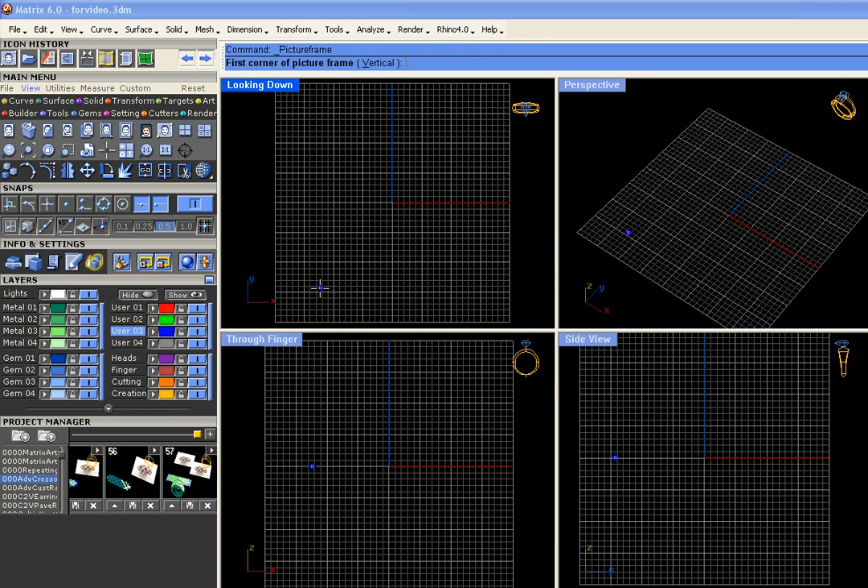Okay, once you've found that image, hit open, and the next thing will be to click Shift and drag the bottom edge of that photo along. Okay, and then you'll be able to center this and scale it to the size of the actual ring so you get some idea of the size this should be. So let's begin with the finger size, the finger rail, and then we can center this on the finger rail about 2 millimeters past the edges of it. That's actually not so bad.

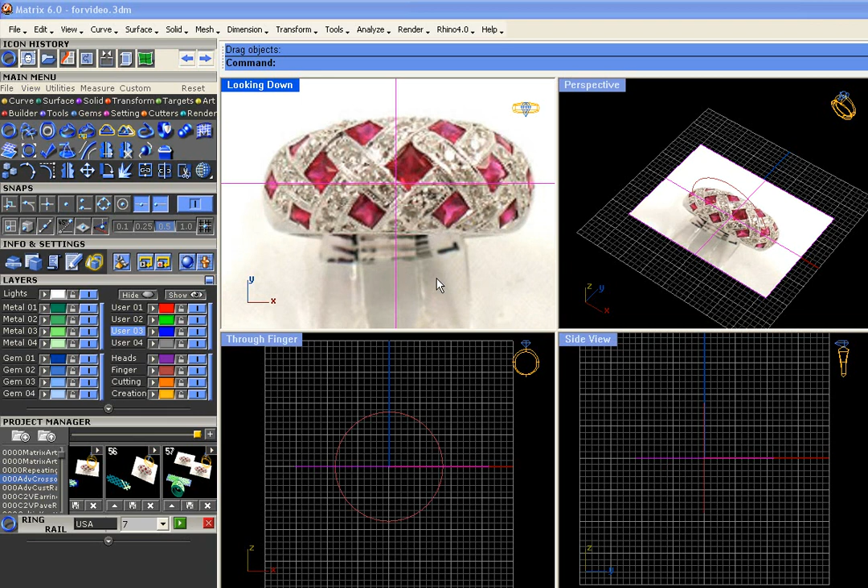Okay, or if you prefer, you can just click and drag this off. The picture frame is a great tool to use because you can just pick up the surface and drag it around. The only thing is I like to put it on a layer color I don't use a lot, such as lights, and then lock that layer. And that way I can't accidentally select it.

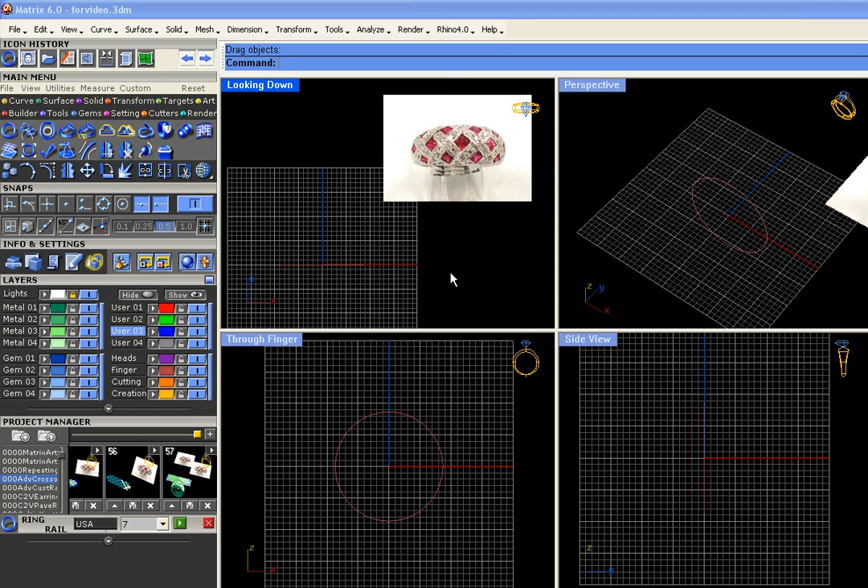Okay. To begin creating this, let's draw the taper for this ring in the side view. To start, I'm going to just place the curve tool line with the both sides option here right at the inside of that finger rail. And as I hold down Shift, I'm going to drag this out to the width that I want at the bottom of the ring. I want it a little wider actually, so right click, both sides, click and drag that out. Okay.

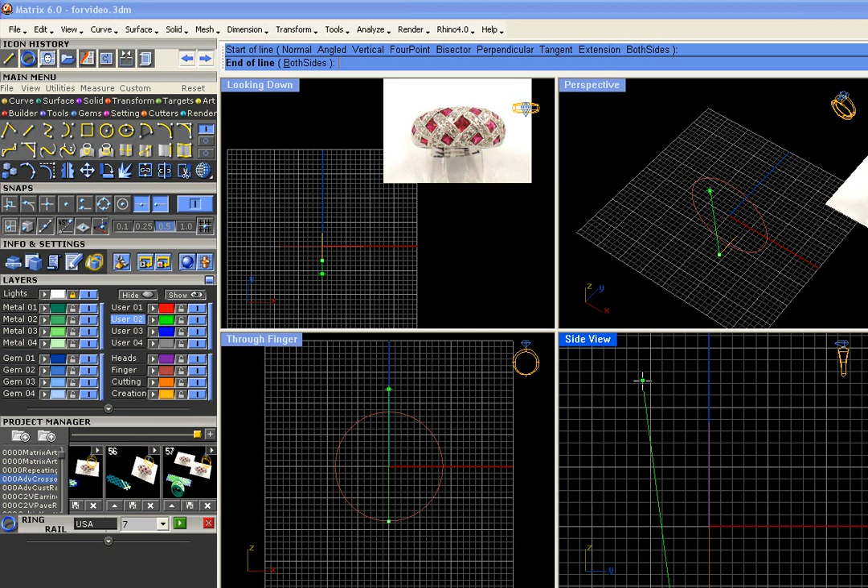The next thing is going to be to create this taper with the line tool. Just click into the end right here and extend it pretty far up past the top of this to the width you want for the ring. F4, Shift. Okay. I just mirrored that to the other side using F4. Okay.

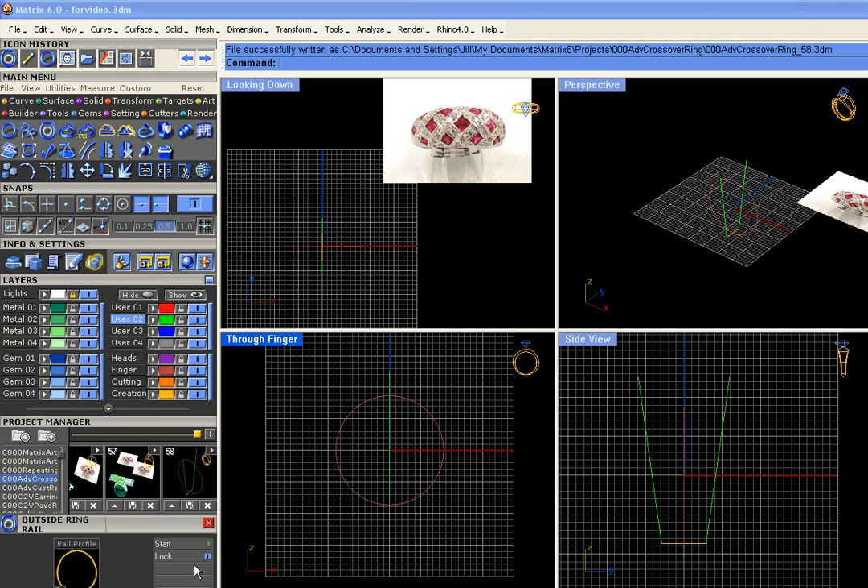The next thing will be to place the outside finger rail here. With the outside rail tool, just hit start and you'll get all the handles for that. We're actually going to just create the side of the ring using this. So we're going to draw this up to 1.5, this down to 1.3, and this is the bottom up to 1 millimeter. Holding down Shift, you can get those right on. Okay, press Enter to keep that.

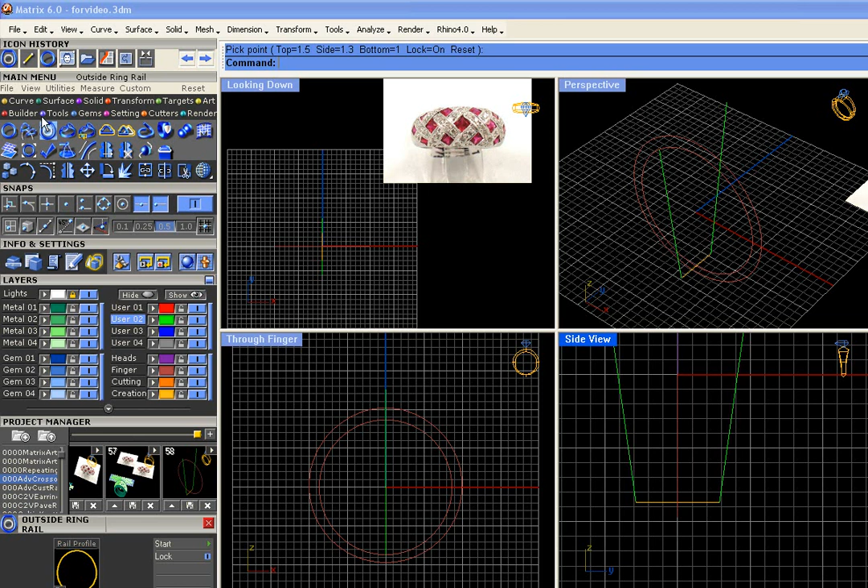And using curve from two views, we're going to be able to place the outside and inside finger rail on an angle with these two curves. Before we do that, as you know, these curves have to extend down past the end of this rail, which they don't yet. So we're going to run the extend command. That lives right here in the curve menu. Just press enter for dynamic extend. We're going to extend this guy

and this guy. Okay, and what happened there is Rhino history is turned on, so when you extend one curve that has been mirrored, its mirrored copy also does the extend. So we can turn that off. It sometimes messes with matrix history. Okay, and let's drop back this.

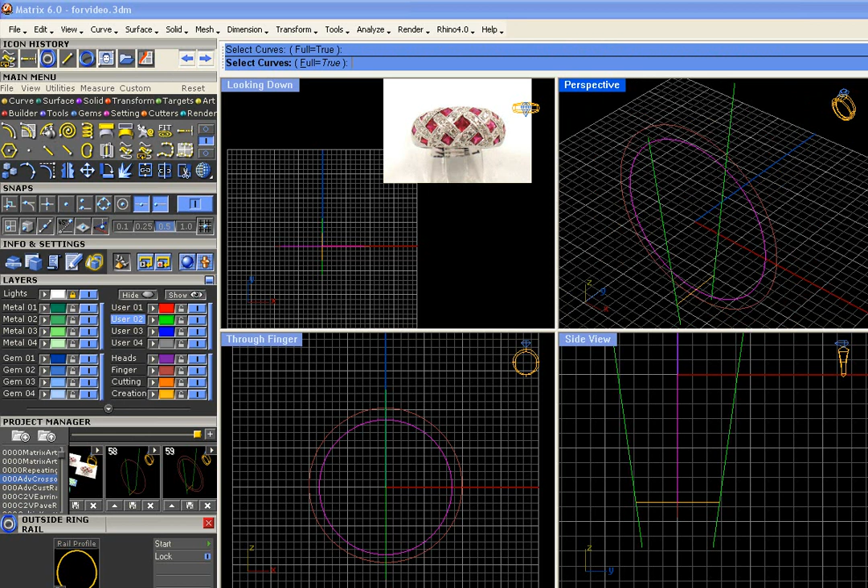Alright, curve from two views is going to give us two curves that match the angle of the green lines there. So let's run curve from two views with history with the inside finger rail and one line. Repeat the inside finger rail and the other line. Repeat the curve from two views with the outside rail and the line. And one more time with the outside rail and the line. And there you go.

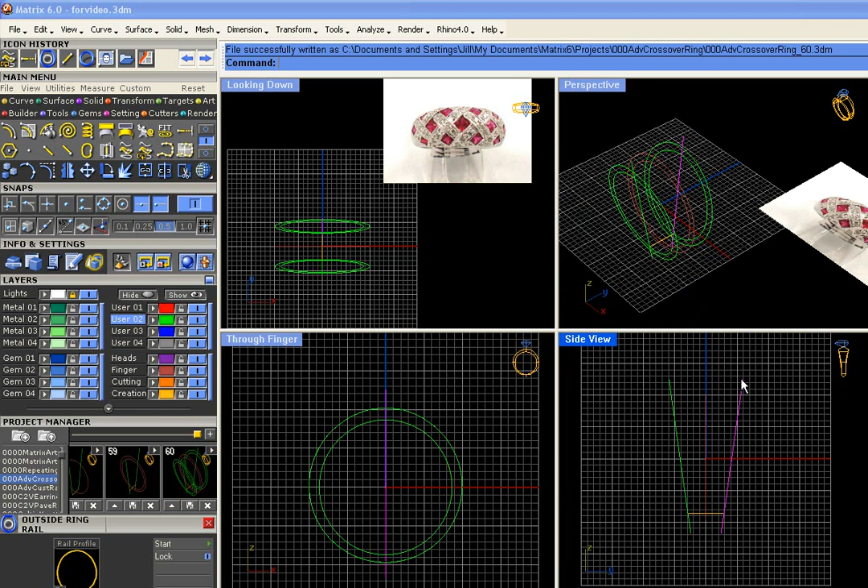Okay, we're going to look at creating the profiles for this. Now, I like to hang on to the original curves, so select these, run the duplicate in place option, and with one copy still selected, place those in another layer color and turn them off. That way you've got a copy saved. We're going to take the originals here and split them with the two sets of curves that touch them. Okay, we can get rid of everything we don't need.

Delete that, and what we're left with are curves that touch precisely. We're going to be just surface modeling this little ring. It's a pretty simple ring, but we want to make sure everything lines up. We're going to show you how to do that.

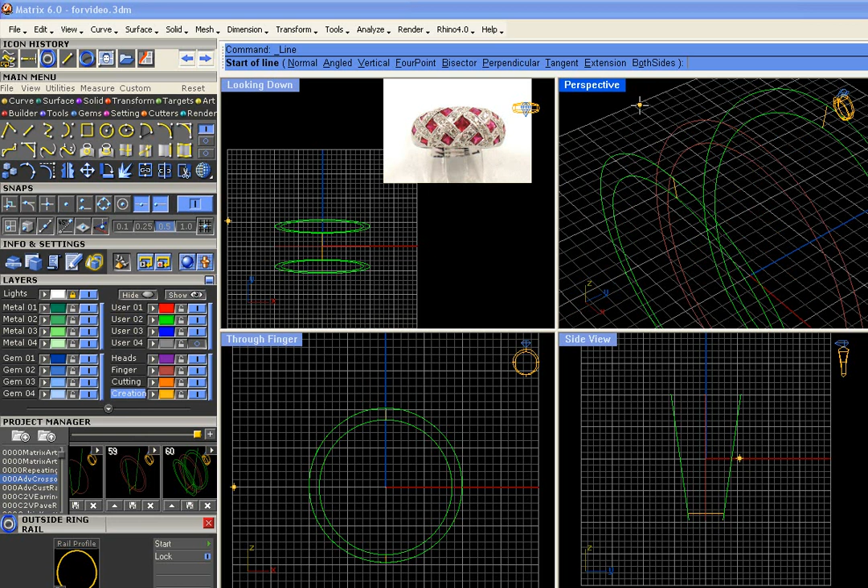Okay, so right now these profiles touch these rails perfectly. With the line tool again, we're going to draw a profile that extends between these two and touches them end to end. So we've got a matching at the top and the bottom. And we'll go ahead and join this.

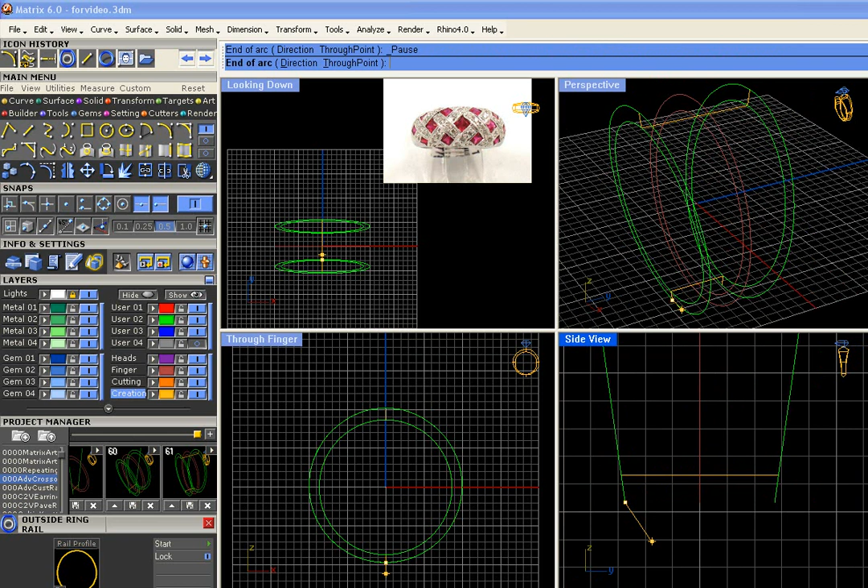And now with our arc direction tool, we're going to create the bend in this ring. So grab the arc direction, and touching the end and the end, we're just going to draw this as high as we want for the profile on the ring. So about 2 millimeters there.

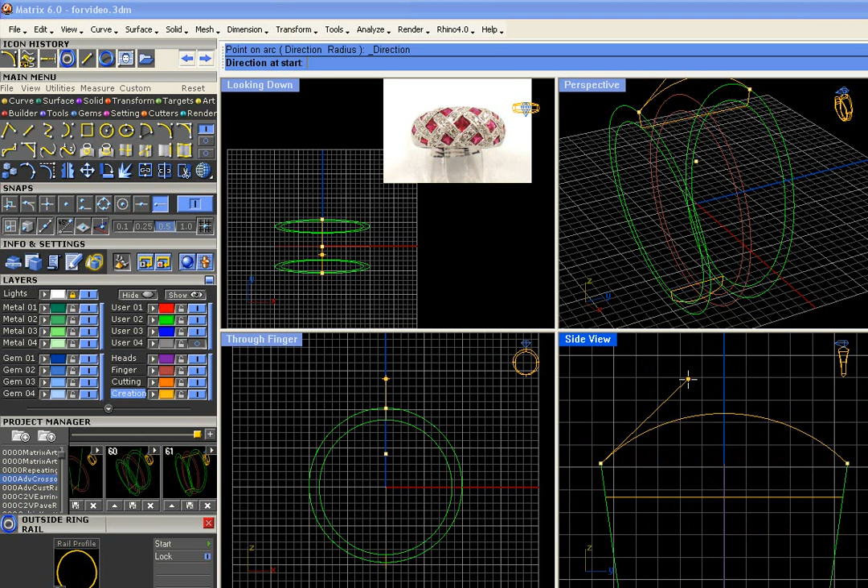Same thing at the top. Between the end, we should have an end in there. Between the end and the end. And just draw that up as high as you want. And in this way we can create a different curvature at the bottom as at the top.

We want this to really poof up more at the top. In fact, we could even do that a little bit more and really get that thing tall and puffy at the top. Okay, join this.

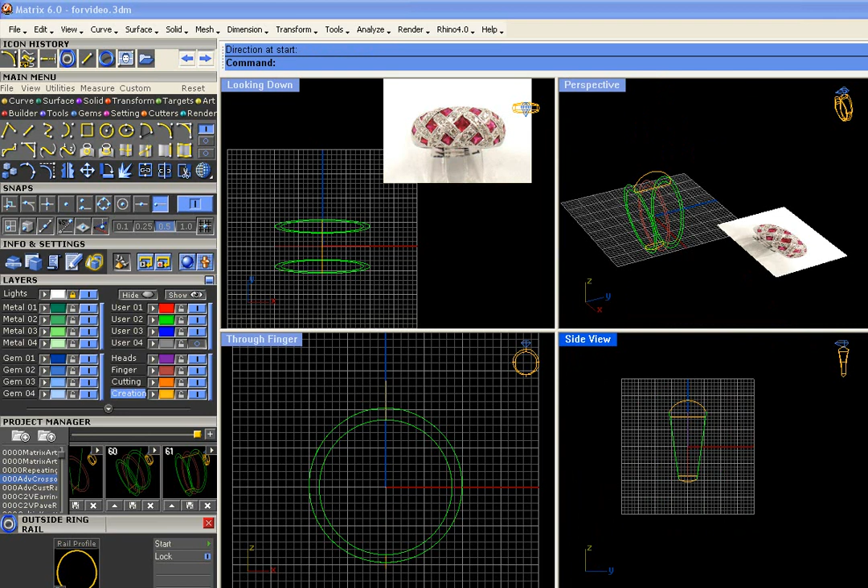Okay, and notice that we didn't join these profiles together. We're all ready to sweep them in 4 separate sweep 2 operations. This is exactly what multi-rail sweep does, only we're going to control it so that we get 4 separate surfaces in the end. So sweep 2 between the 2 rails and the profiles that touch them.

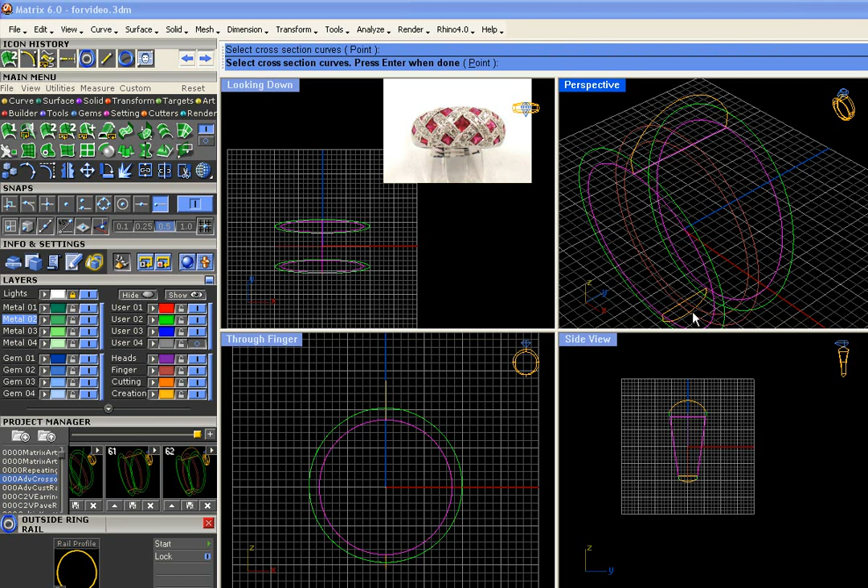Okay. Oops. Oh, we can mirror the whole thing afterwards anyway. Sweep 2 between the 2 rails and the profiles. Oops. Sweep 2 between the 2 rails and the profiles that touch them. Mirror this guy.

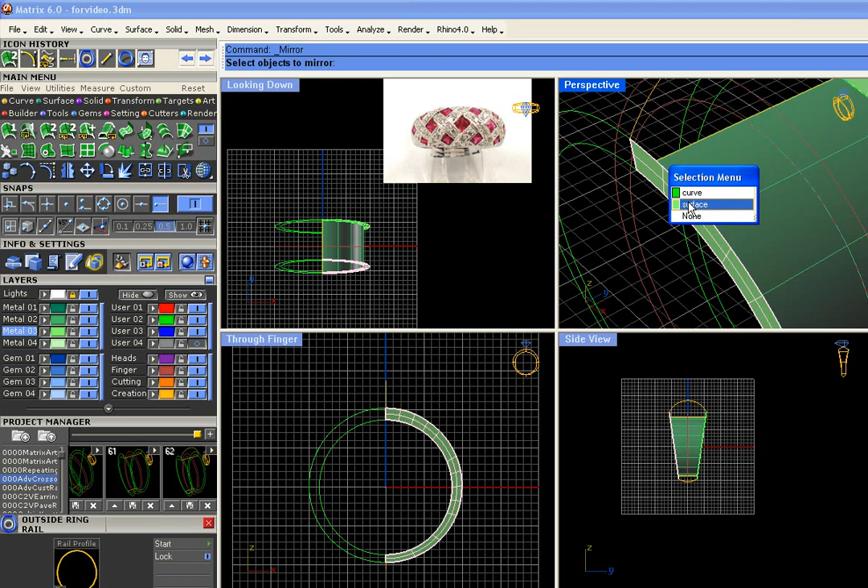F4, shift. Sweep 2 one last time between the 2 rails and the profiles that touch them. Okay, you can see the really nice shape of that.

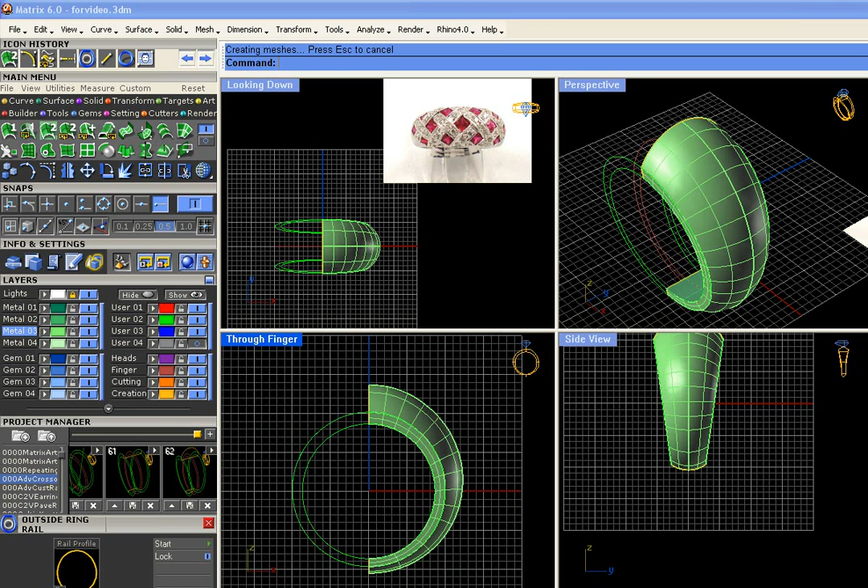And we can take all these surfaces, join them up, and mirror them to the other side of the ring. F4, shift, and join everything together. And it should create for you a closed solid polysurface if you join the inside. I forgot to mirror and join the inside. Join. Your closed solid polysurface.

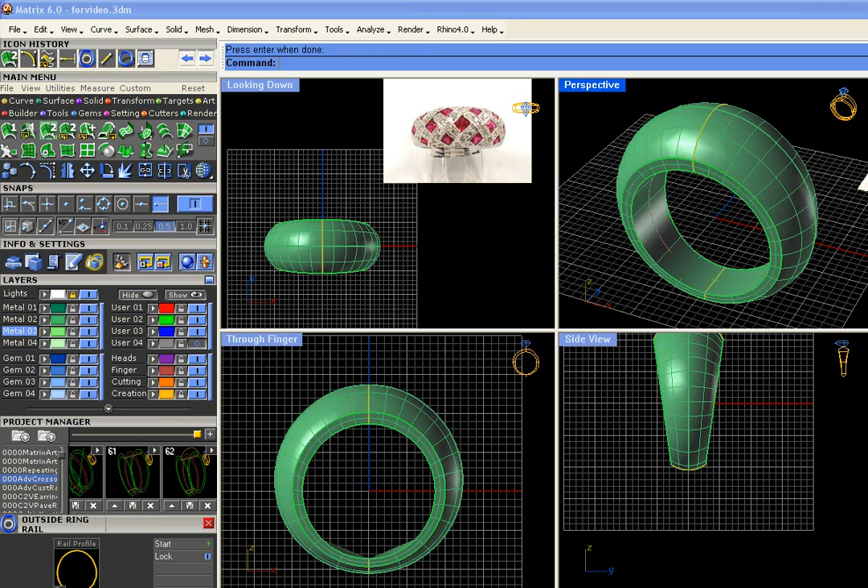Okay, get used to that. We're going to be checking for that a lot during this tutorial. It's a pretty tricky one. Okay, remember how I said I like to keep those curves around? Let's bring them back right now. They're right here. And we'll offset them to create a shape for the inset surface that all this stuff is going to go onto. Okay, so let's offset these one at a time here.

If you're not sure exactly how far you want them, just use the through-point option. And when it looks good, click. Okay, you can either mirror this or just offset the other one. We'll mirror it. And we'll put them on another layer color so you can see them really well. Cutting layer. Okay, and also determine how far down the ring you want that little surface to end.

And with the line tool, and making sure project is turned on because we're going to draw this straight flat in the viewport, just draw about the shape for that. Notice how it comes to a V here on the side. Trust me, it comes to a V on the side. And go ahead and mirror this one. F4, shift.

Now we can take all the orange colors, hit trim, and just get rid of the parts we don't need from this shape.

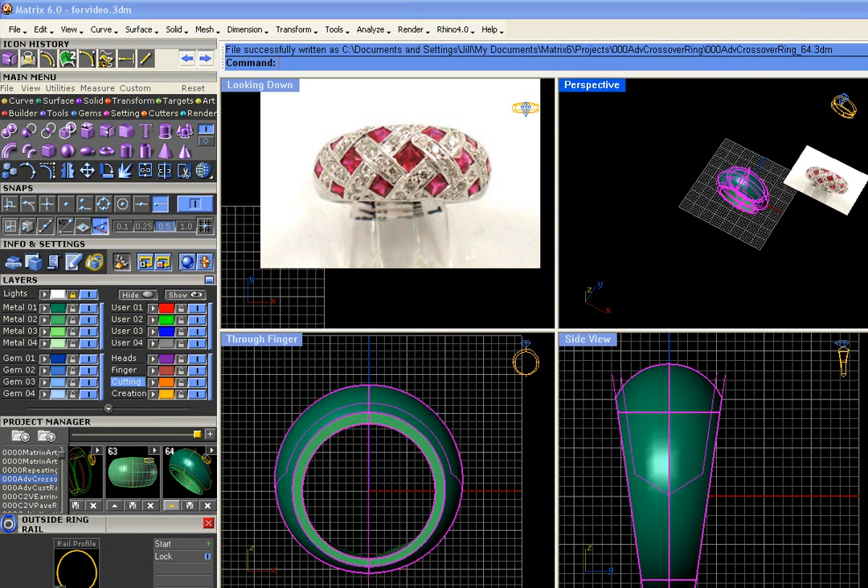We're now going to split the green surface with the orange curve. One surface has been split into two pieces, and there's one piece and there's the other. So let's take that first piece, put it on a new layer color here so we can get a good look at it. Now we're going to scale this down in order to create the inset surface.

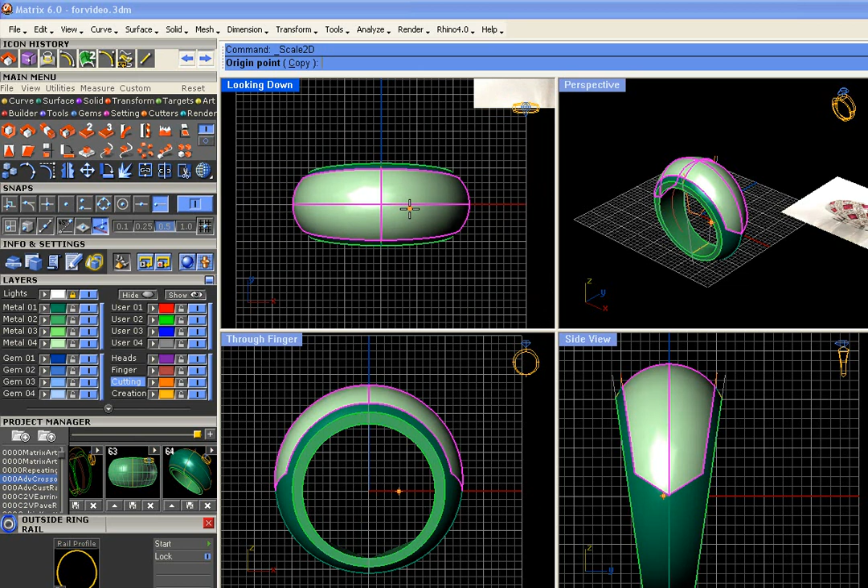So let's select just this surface here, run the transform command, scale 2D, and then looking down from F4, we're just going to click shift and scale this down a little ways. Notice that it's scaling it smaller on the top and the sides, which is good, but the very top of the surface is still all the way up at the top of the ring. So we use 1D scale from the end osnap up and just scale that down, making sure you're holding down shift so it doesn't make things go out of whack here.

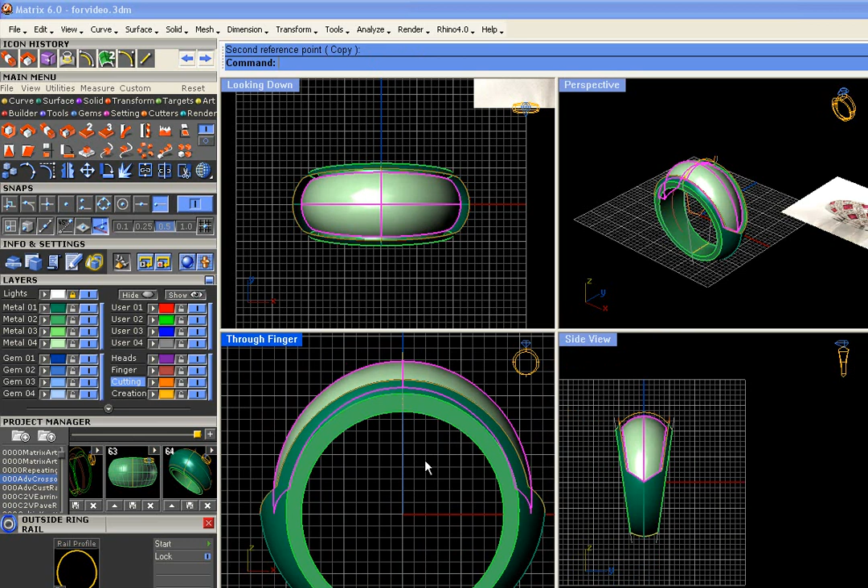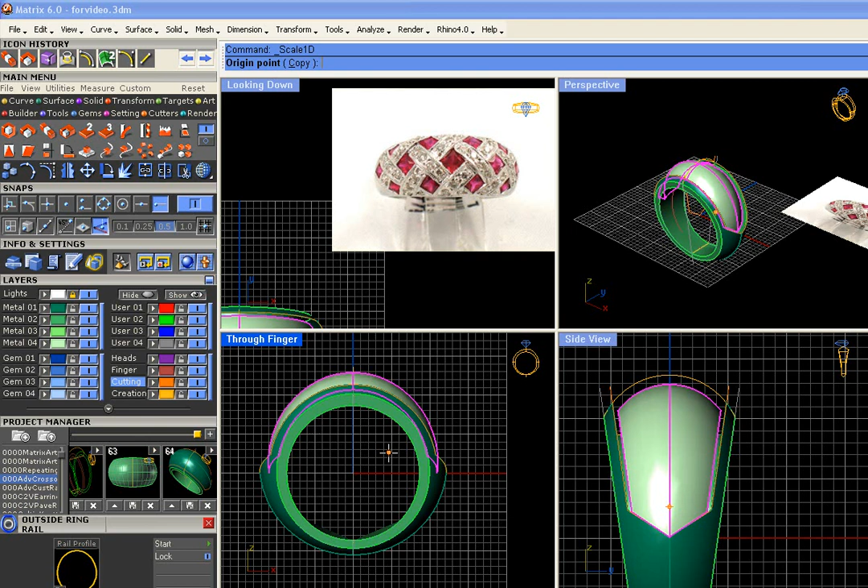Then just depending on how you want this to look, you can finagle it a little more. We're just creating an inset that all this stuff is going to be put onto. So all this stuff is going to be just about planar with the top of that ring. So you're not going to see this really weird shape on the side. Of course, you don't see it here. We're just making a surface to flow this whole design and to lay these gems out on. So you don't have to really worry about that so much. So let's leave it all uniform there. Let's job bag this.

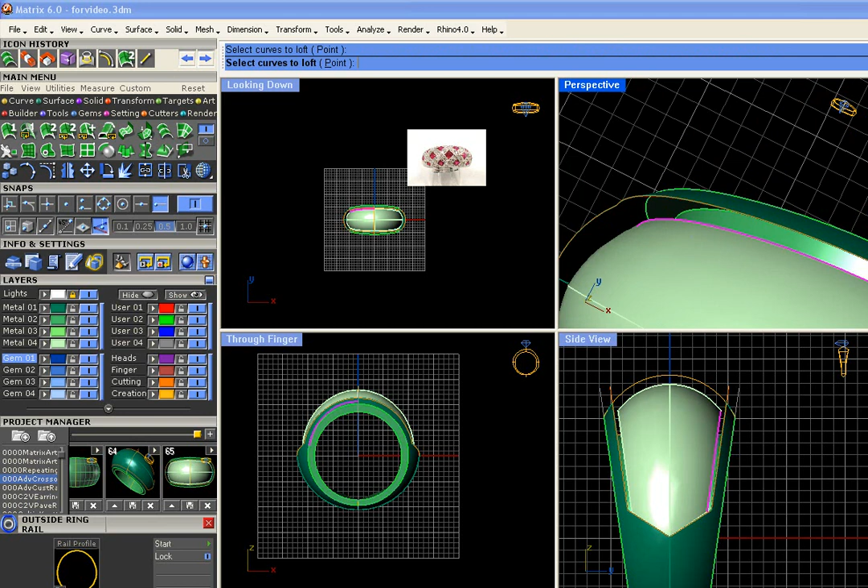And to create this as a solid model so that we don't get all lazy here, we're just going to close it up with the loft tool. So with yet another layer color, go to the loft command and just work your way around the edges that line up. Okay, and we'll go around this whole ring, lofting between these edges. Oops, not that edge, this edge. Okay, and I'm just going to pause the video while I do this because it's boring.

Oh, that was so boring. I almost put myself to sleep.

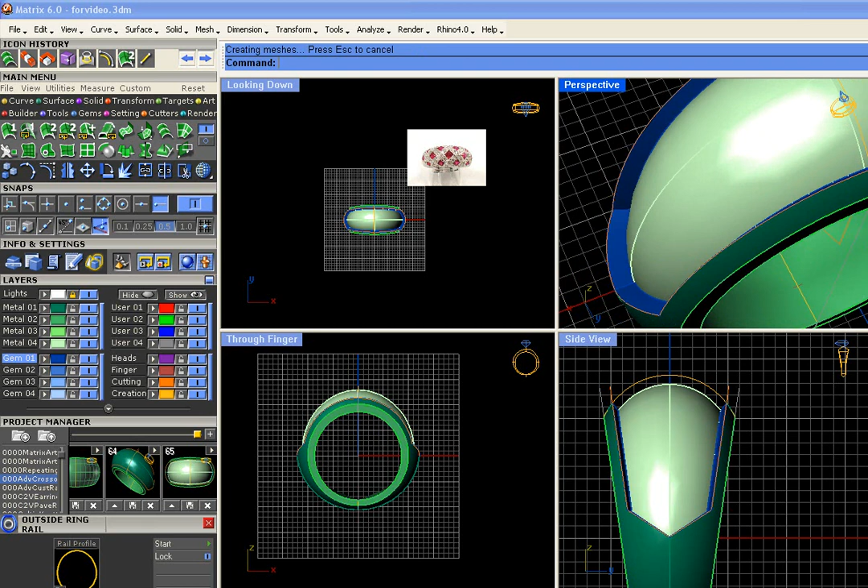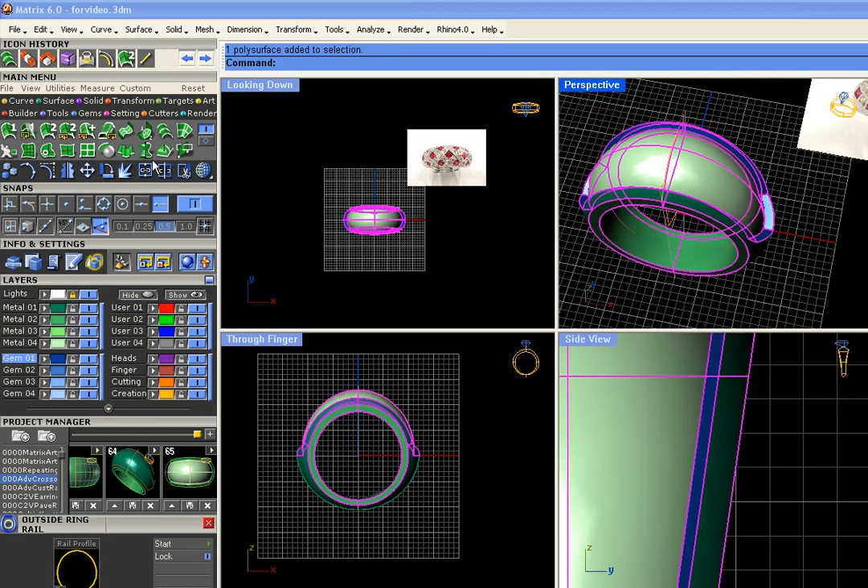Okay, so just notice that all the edges are lofted. They're little surfaces. Just don't get lazy and mirror these. Just make sure you build them all because you want this model to be solid in the end. So let's grab all these, and all these. Does anyone else have trouble telling between those two shades of green? And join. Okay, we're definitely missing a green. Join. And check it out, and it's closed. That's good to know. And we'll jog bag this.

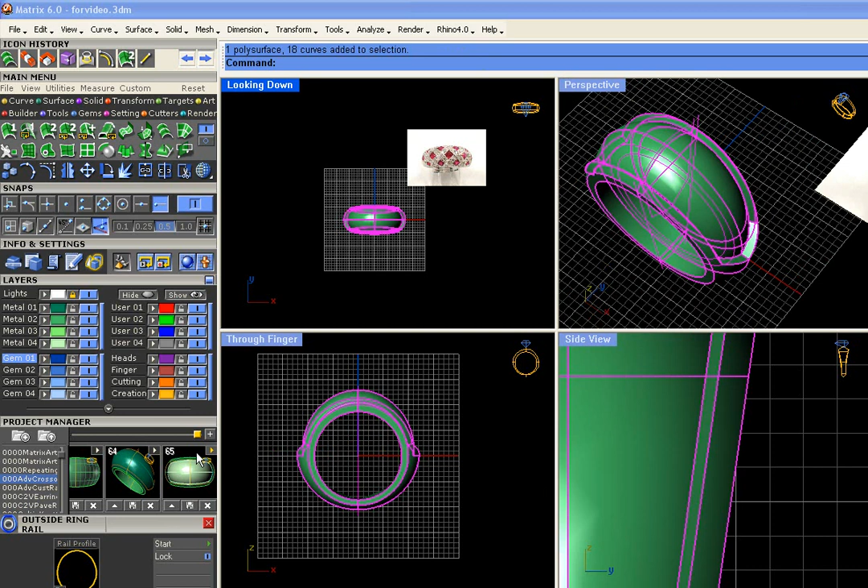Okay. However, this is not the surface that we're going to flow this design up onto because we need an untrimmed surface for those little UV curve commands, and this one has